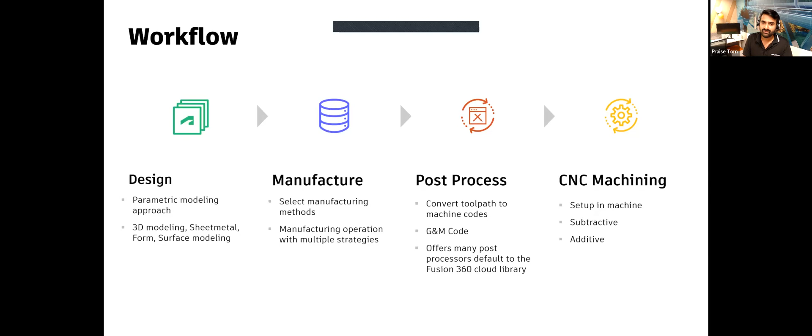So basically, a CNC machine operates based on graphing coordinate pairs, which we all did in our schools. For example, if you say a 2, 3 location in the XY plane, you know how to mark those points on the graph sheet, right? So basically, there are a set of G codes and M codes. Based on that, the machine will operate. And if you give the coordinates, it moves to the respective position.

For example, these are some of the important codes which you should know as a beginner. M06 T1 is the command for the machine to change the tool to 1. M03 S7000 means spindle start in clockwise direction at an RPM of 7000. M04 is for anti-clockwise direction. Next one, G54 is for the work coordinate system, where we set up the work coordinates for the workpiece.

G90 is absolute coordinates. What it means is it takes all the coordinates with respect to the work coordinate system. G17 is the XY plane. G43 H1 is the command which we give the machine for the tool offset value. And M08 is coolant on. Then we give all XY locations. Based on all these codes, the machine will start moving to the respective X and Y coordinates. As you know, Z is perpendicular to this plane, right?

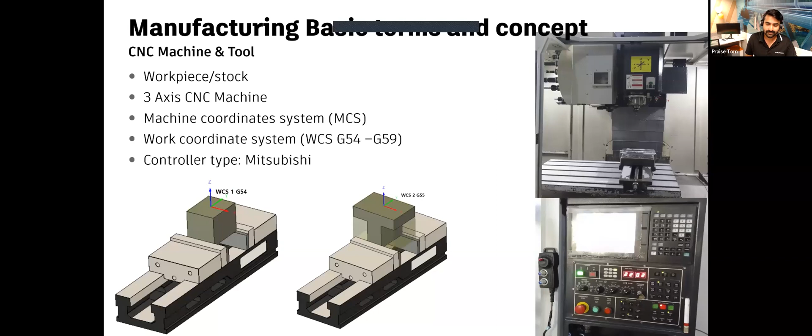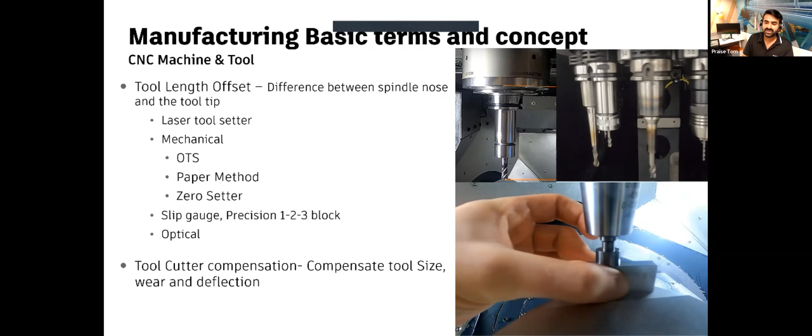There are some methods to get the tool offset value. The first one is the laser method. It has a laser sensor, with a laser beam measuring the length. Next one is the mechanical method, where you use a mechanical device and touch the tool onto this device to determine the length. Next, you can use a slip gauge or a precision 1-2-3 block. It's a predefined size block, and you can jog the machine onto it. The last one is optical sensors, which determine how far the tool tip is from the spindle nose.

Next one is cutter compensation. This is basically for tool diameter, tool length, or tool wear or deflection. If you are undergoing a continuous production process, the tool will wear after 2 or 3 operations, depending upon the tool. So it's our duty to maintain the precision. You always have to measure the tool diameter, and if there are any changes, you have to compensate that in the machine so that you will be able to produce accurate components.

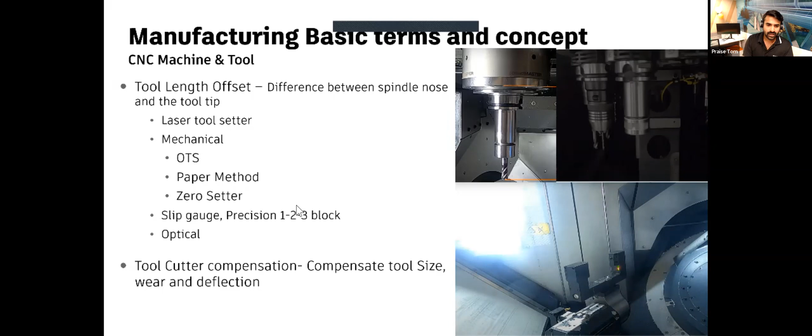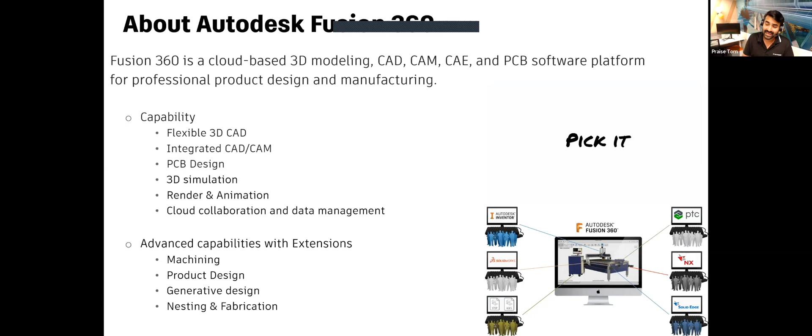As an intro, in Fusion 360, most of you know that it's a cloud-based software. It has integrated CAD, CAM, simulation, generative design, and cloud collaboration. Additional capabilities with the extension allow you to work with product design, nesting, and fabrication for sheet metal parts.

So basically in the Fusion 360 workspace, most of you know, I will quickly go through it. This is called the data panel, and these are the available workspaces. Towards the right, you can see the toolbars. This is known as the browser tab. And on the bottom, you see the design timeline, meaning if you select any component, you will be able to see all the processes which have taken place.

In Fusion 360, all files will be saved in the cloud. You can create a new project like a folder, and also invite people to your project. So these are the components—there are 2 components. I'm going to save this in the correct location, and it's going to save as version number 1.

You can always edit, as all other software do—it's parametric, so it will adjust automatically. You can use the assembly tab to do the connection. Then, finally, if you save the component, you can see that it takes place as version 2. At any point in time, you can go back to version 1 and see all the changes you have made.

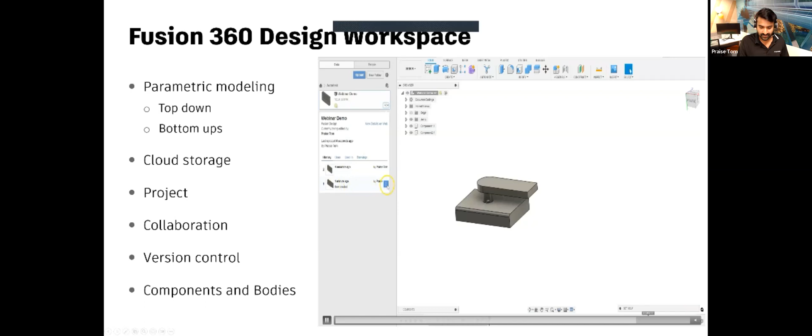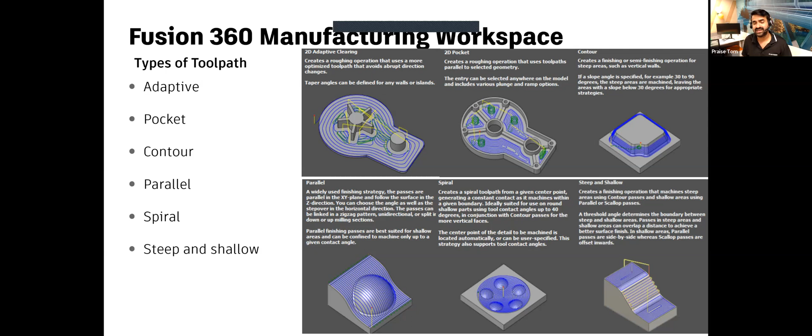Let's explore some of the important points you have to remember while setting up the manufacturing job in Fusion 360. First, you have to decide the work coordinate system. Then you have to decide the stock. Then you create the toolpath. Then you post-process the toolpath, whatever was generated in Fusion 360.

This is the manufacturing workspace of Fusion 360. It has milling, turning, additive, inspection, and fabrication. For this part, we are going to do a milling operation. The first process is to create a setup, then generate the toolpath—you see the toolpath there. So let me create a new toolpath here. The machine is optional; select the operation type first.

You can define the work coordinate system, then decide what model you are going to check. Accessibility analysis checks whether you are able to access all the areas with the tool. The next process is to set up the workpiece—there are different options. You can use fixed or relative, whatever the available standard size of workpiece or stock you have. The next tab is for naming the program and setting up the work coordinate system.

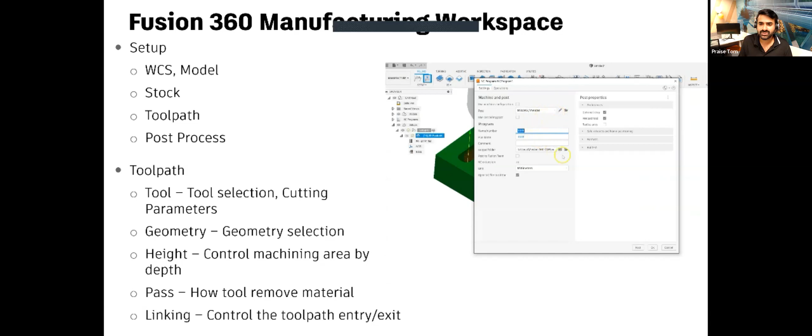So once it's done and you're happy with it, you can post your toolpath into G code and M code. You have to choose a post processor according to your machine. All right, so it's going to create a G code and M code as you see here.

So this one we are going to insert into the machine, so the operation will take place. I repeat, in any manufacture workspace, first thing is you have to decide what is the work coordinate system, so that the machine will understand this is my work coordinate system. Select the model which we created in the 3D design workspace, select the stock available to you, create the toolpath, then post process it.

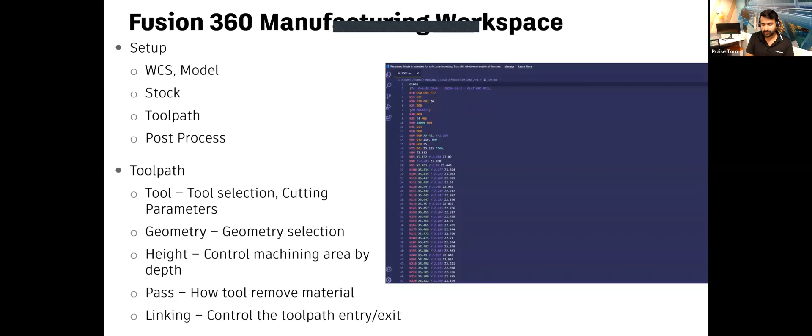All right, so this is the model which we have manufactured. This is an aerospace component which we did for testing purposes before the actual production. It has two holes with a thread and counter bore. There are a set of slant edges and a curved face here.

Generally, to finish this part, you need to have two setups, right? We can use facing, drilling, tapping, 3D, 2D, all the toolpaths to finish this part. So let's see how to set up this first.

So I have the components here, I hope you can see it. Yep, so this we have created in the CNC machine. So the problem here is to decide which face we have to cover first, right?

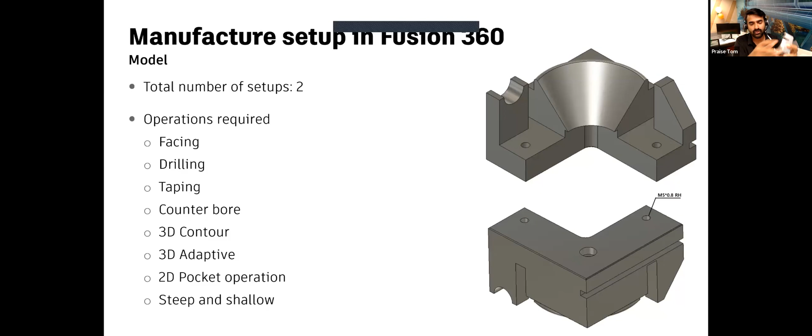So here, if I cover the top face first in my setup one, you have to flip it over. So we might have less space to hold this workpiece on a vise. So what we decided, the best way to go with it, is you have to finish setup number one first, like this.

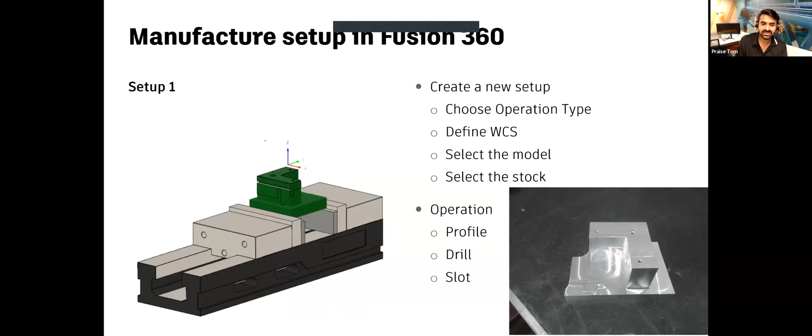So we are going to use a profile operation, drilling, and slot operation, or the undercut you can see there. Once we've done that, we will get an output like this. So now we will take this and finish the workpiece in setup number two and finish the job.

So to create this model, we need to have two setups in a 3-axis machine. Here we have a set of operations which we chose according to our machine and the toolpath. There is no hardcore rule that you have to follow only these kinds of toolpaths to create this model. Of course, it will vary from person to person, and depends upon the machine capabilities as well. The feeds and speeds you always have to refer to the standard manual. You can decide; we are not talking anything about that right now in this session.

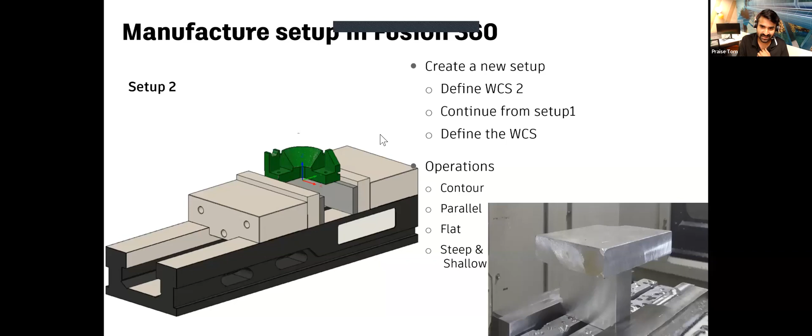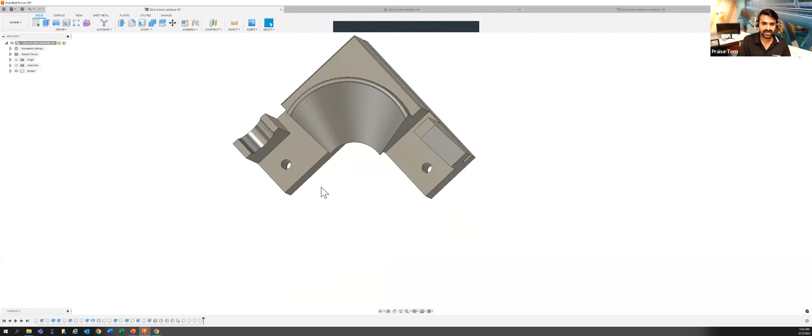All right, so let's get into Fusion and see how to set up the job. So the first process, as I mentioned, this is the model. What you see here, it has a slot undercut, and here we have a threaded hole, and there is a counter bore here. In the manufacture workspace, we have to first create the setup. To create the setup, just click here and the option here.

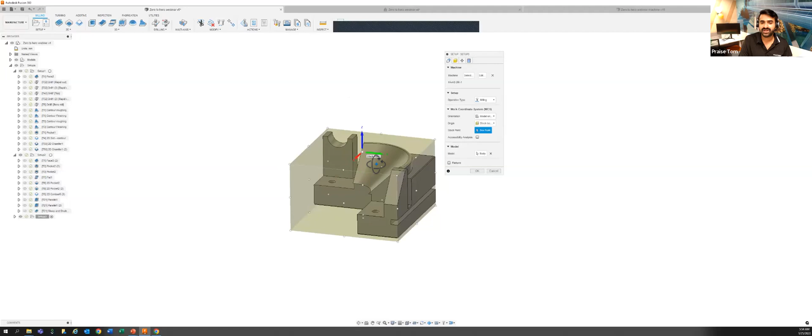If you have any model, first process, what you will do is select a stock. You have to select a stock first by using fixed or relative size. Then you can decide what type of operation you are going to do. Then you can select what is your work coordinate system. The work coordinate system can be defined based on the workpiece or on the model, wherever you can measure it on the CNC machine. Select the model, and here you can type your program number and the work coordinate system here.

So while setting up the workpiece on the CNC machine, the first thing you have to do is set up the vise in such a way that it is aligned properly.

Then you have to load all the tools which are required and add all the tool parameters, diameter, tool offset to the machine. So you will have a set of tool numbers, maybe let's say 10 tools, and you will have to add the corresponding diameter and length. Then the next process is you have to set up the work coordinate system.

As I mentioned, the machine has its own default coordinates. So by defining the work coordinate system, we are telling the machine where my job, the workpiece, is located. You have to create the toolpath around that.

For that, you have to load the stock, then use the edge finder to find the edges, and use the zero setter to find the height or length of the tool.

Basically, the edge finder is a tool where, when it runs at a certain speed, the bottom portion is coaxially placed. Once it touches any surface, it will move out so that you can take that coordinate and add it to the machine.

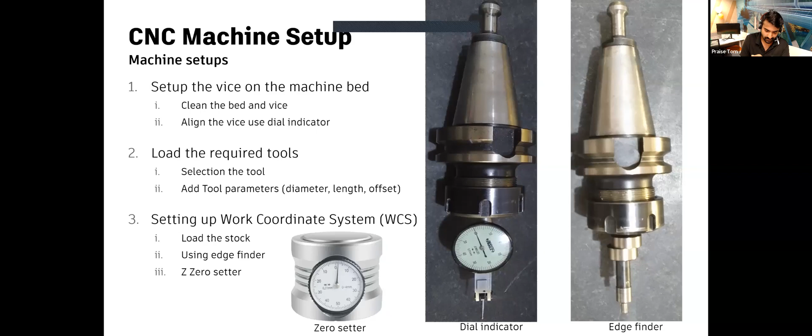So let's see the process in detail. The first one is setting up the vise. You have to take the dial, fix the vise on the bed, and try to align it, making sure the dial reading is not changing, meaning it is horizontal to the machine.

Next is the zero setter. To find the tool length offset, you take the tool and touch it on this zero setter. This zero setter has a 50 mm height, and the machine knows where its bed is, so it will take the reference from the nose to the tool tip. Similarly, you will have to do this for all the tools and add them to the CNC machine.

So the next step is setting up the work coordinate system. For that, we use the edge finder, which is rotating at 7,500 RPM. Once it is touched to the surface, you can see a small oscillation here, it's offset from its axis. Take that coordinate, and the important point here is you have to find the center point.

So it has a diameter, and you have to subtract the radius to get exactly the center point. You subtract the radius, and then only will you get the edge of the workpiece.

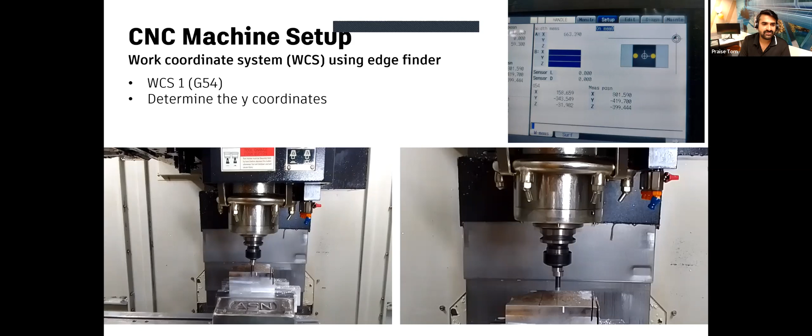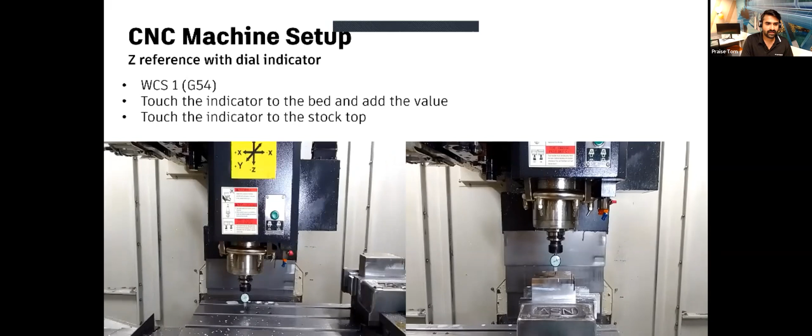Moving on, once you set up the job and the workpiece, the next part is to generate the toolpath. So let's see how to generate the toolpath for setup one in Fusion 360. I'm saying it again, this is not the only way to create the toolpath. You can use any type of toolpath to finish this model according to your machine capabilities and tool properties. So this is my work.

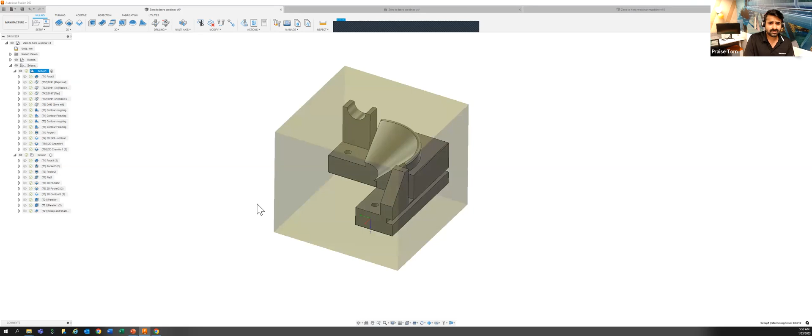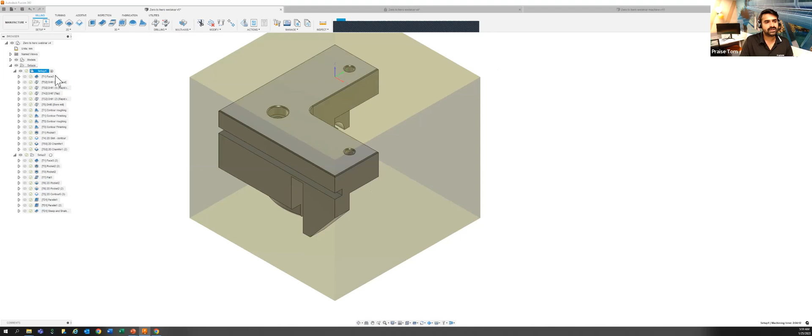This is my model and this is my stock. The first process is you're going to finish this. Let me just align it. Yeah, we are going to finish this setup first. That means our work coordinate system is here. The first process is a facing operation. So all these tool movements are taken with respect to the work coordinate system because we are using G90 absolute coordinates.

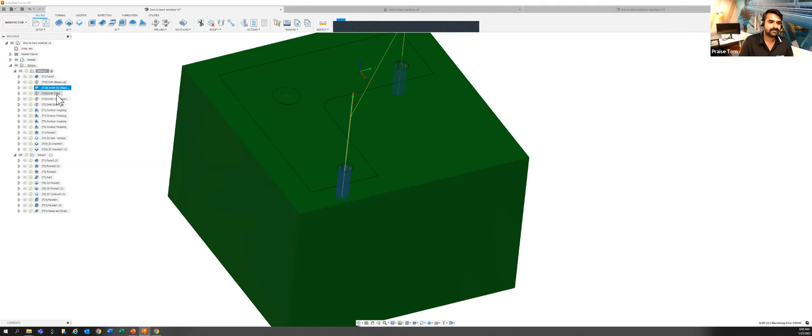So the next process is the drilling process. Before you do any drilling process, you have to do a spot drill so that the drilling can happen properly. Then the drilling, then the tapping. Tapping is for the threading operation. And then you have a contour roughing, then contour finishing, again the contour roughing inside pockets, contour finishing here, then the pocket, and there is an undercut here. So we use a contour operation, then finally the chamfer.

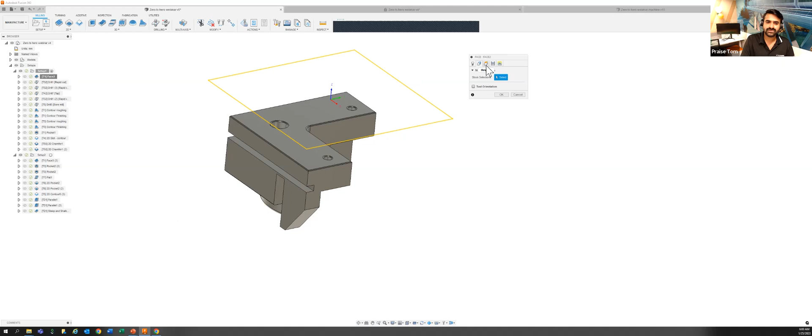So in a facing toolpath, you don't have many things to select or worry about, because since your model is already selected, you just have to set the bottom reference. Bottom reference is nothing but the point till which you want to cut the material. You can select from different types. So I chose my model top as the bottom reference. That means it's going to cut till the model top.

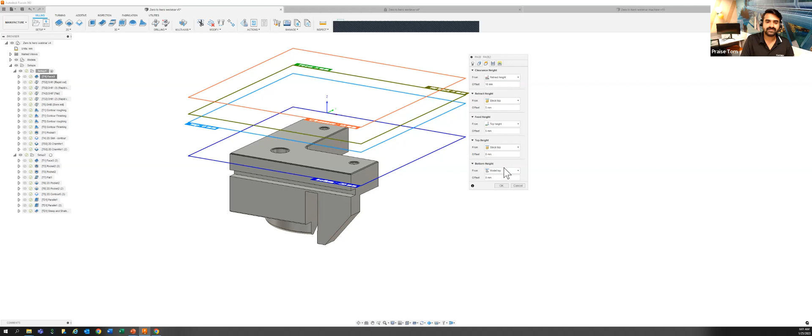And in the passes tab, you can choose the operation which you want. Here, since my tool is not carbide, I have to make sure that the depth of cut, the step down, is less. So I just use the minimum multiple depths here. And in the linking tab, how the tool should approach. Then the next operation is drilling. It's a spot drilling here.

So in the spot drilling, what I selected here is the hole face, right? And then the bottom reference I chose as the chamfer diameter. What is the chamfer diameter? Yeah, pretty much that we have to give as input to create a spot drill. If you are new to Fusion and new to the workspace, the first thing you have to do is just select the face, click OK and see how the toolpath is generated. If it is not according to your need, then come back and see what else you can adjust.

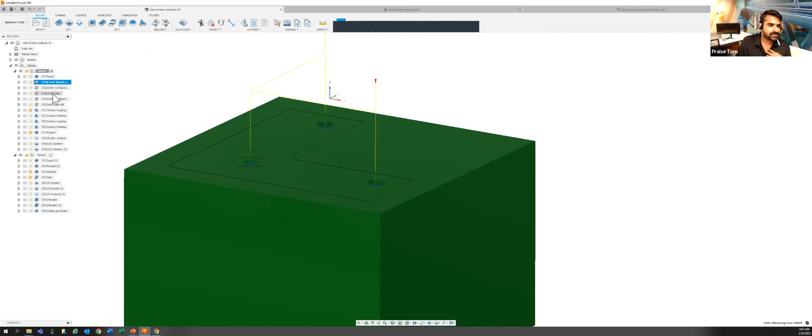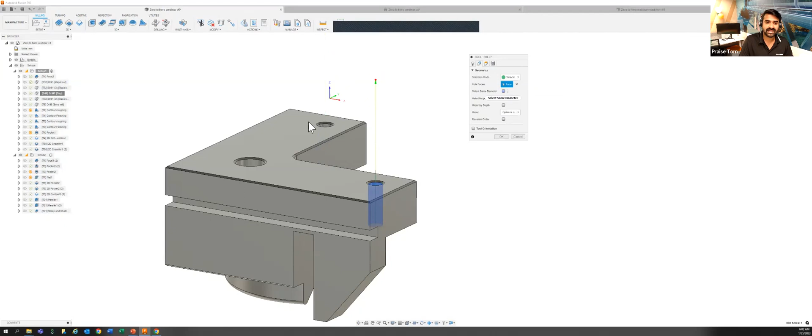Right, so then the next process is drilling. Here you have a geometry. You have to select the face. In the geometry tab, of course, the tool is default. And select the diameter. If you have multiple holes, you can use the same diameter option so that it selects the multiple same diameters at once. You don't need to select one by one. And again here, this is the height tab. That means till what depth the drill bit has to go. Then the cycle operation, whether it is tapping or drilling.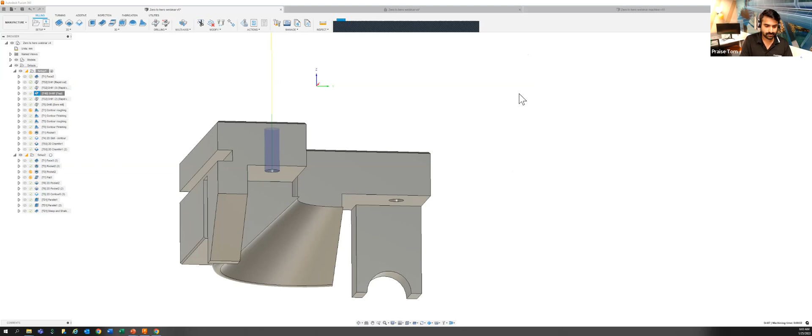So basically in the drilling workspace, all the methods look the same. The only thing is the operation, whether it is drilling, rapid out or tapping, has to change in the cycle type. So let's get into the PowerPoint and see how the toolpath is generated. As I mentioned, there are a set of operations you can use to finish setup number one. This is the spot drill, which we use initially to make sure the drill bit passes through the material properly. We do it on the center point of each hole before the actual drill. The next one is the tapping operation. We use a tap tool, select the hole and use the tapping operations here.

All right. And the next one is contour operations. As you know, they're used to finish the wall. You see the contour operations of internal finish, right? And this is the profile outside. As I mentioned, there is no right or wrong way, no hardcore rule. For example, here I use a face mill to finish the contour operation. It's not necessary to use an end mill to create the contour operations, right? So it's up to you. So let's see in Fusion 360 what the contour operation does.

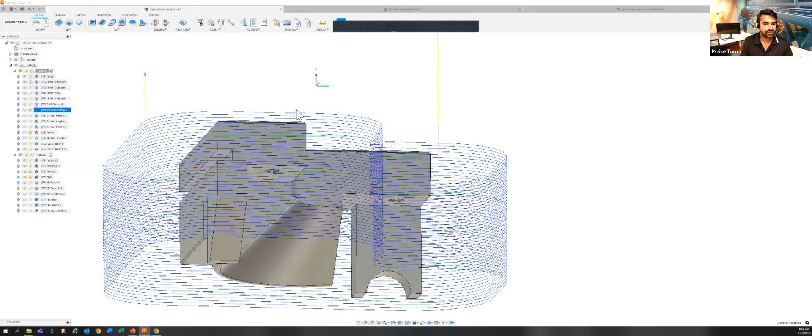In contour operations, what you have to do is select the tool which you want and decide whether the tool has to stay within the boundary or outside the boundary. You have different options, bounding box or a selection. You can choose according to the model. And the important step here is rest machining. Once you enable this, it will continue from whatever operation we have finished. All right. And the next one is to decide the height, how much depth your tool has to go.

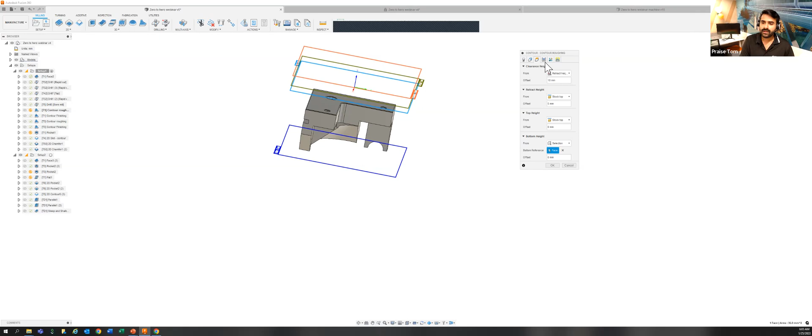Then in the passes tab, you decide how much should be the tolerance. That depends upon the machine and its accuracy, and the direction type, whether it is both ways or one side. Then how much stock you have to leave in the workpiece. Then this option is for a multi-axis machine. Anyway, it's a 3-axis, so we are not going for it.

In the linking tab, what is the type of retraction policy? Once it's done an operation, should it come back? How frequently it should come back, so that it will allow some time for the chip and the tool to cool. And lead in and lead out is how the tool should approach the workpiece. Okay, and that is the roughing operation.

Then I use a finishing operation around this model. So what I have done here is I selected an option to avoid touch surface. You have multiple ways to do it; I'm just showing you the different ways you can select this, so that it avoids touching all those surfaces. It just goes only around that. Or you can even create a sketch and select the geometry.

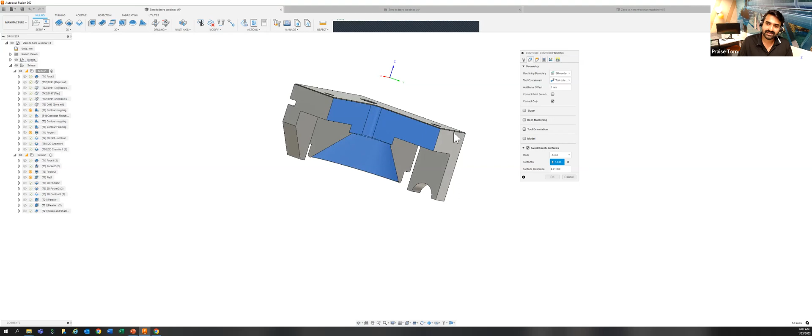Again, the height tab is the same. You can decide how much depth you want to remove the material. Then in the passes tab, again, it's all a repetitive process. You have to click on it and see how the toolpath is generating. If you're happy with it, you can go ahead with that and control the speed. If not, you can go back and edit it here.

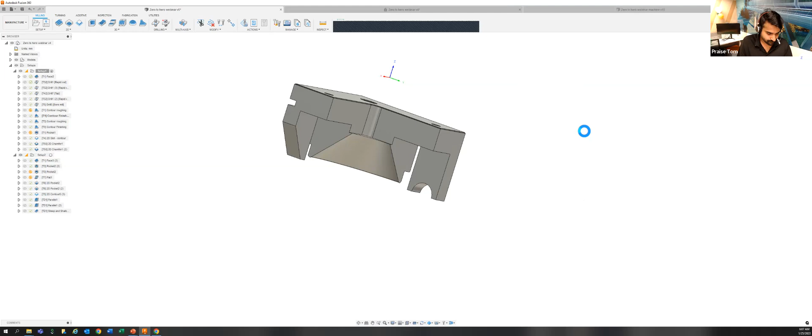All right. So let's see in machining, CNC machining. Yeah, so I didn't cover this. In the slot operation, there is an undercut here. So we have actually a 2D slot, but the problem with that is the slot should be perpendicular to the tool. So we can't really use this slot over here. So what we use is a contour operation with a T-slot cutter. So this is the tool.

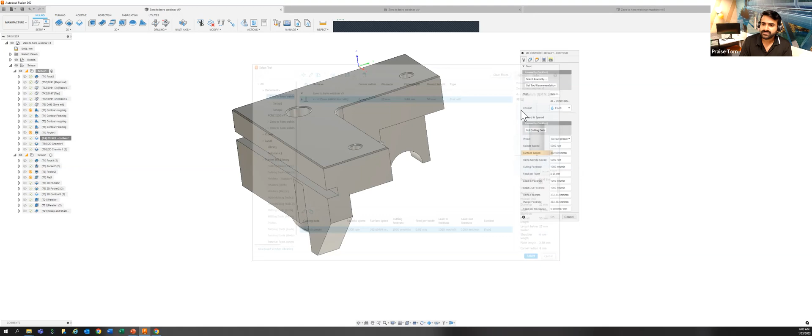If you don't have the tool in the library, you can go back here, select the tool, and you have an option to edit the tool and create a new tool; you can change the diameter and add feed and speed data here. So I use a T-slot cutter here, and the contour selection is here, one edge.

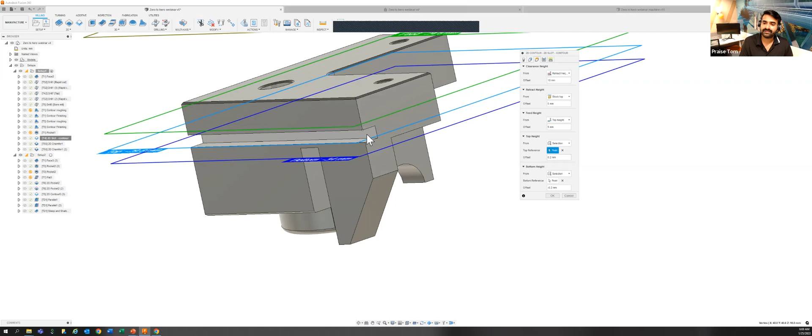And in the heights tab, I took this as a selection point. So here you have an option. You can choose select and select the point or edge or face. And accordingly, you can give the offset value with respect to that. All right, so let's see in simulation how it works. So this is a T-slot cutter, which cuts the material. Yep. So basically, this is the operation. We use a contour toolpath here, not the slot.

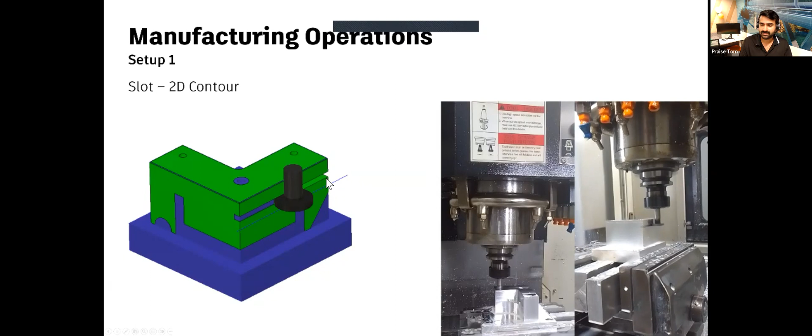Yep. So the final part of setup one is to chamfer all the edges. So we can use the chamfer toolpath, sorry, the chamfer tool to finish the workpiece. For that, you have to define the chamfer width in Fusion 360. So in the Fusion screen, you select the geometry first, right? Then decide how much should be your chamfer width.

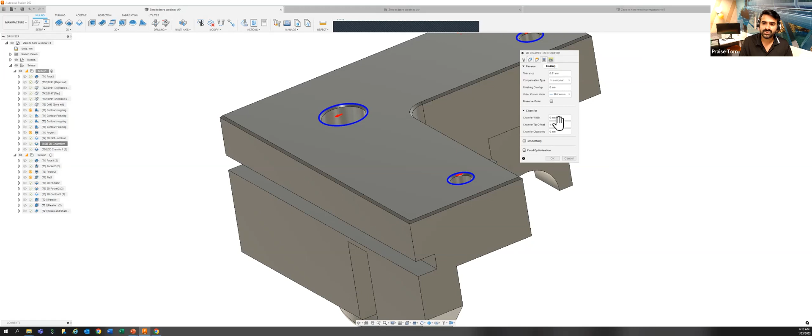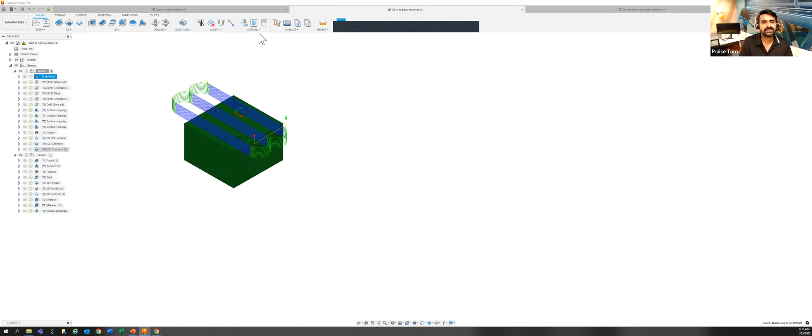So this is my chamfer offset. So I choose 1 mm because my chamfer is 1 mm. Choose that. It's going to finish the toolpath here. Similarly for the edges. So choose the edges of the model, give the chamfer offset, and it's going to create the toolpath, right? So finally, if you want to see the toolpath in Fusion 360, you have an option to simulate to see how the toolpath looks, right?

This is pre-drill, drill, then contour operations. Yeah, roughing, finishing. This is the finishing of the internal with the end mill, then the contour finish. So to remove this extra material, I just use the chamfer finally. All right, so that's how we finish the first setup for the workpiece. So as an output, you will get a workpiece, the model like this.

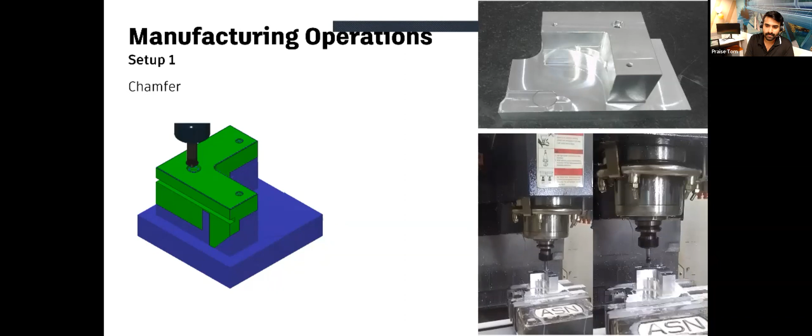Now what we are going to do is flip the workpiece and set up the job. Before doing that, you have to define the work coordinate system. So for that, take the dial indicator, touch on the reference, go to the workpiece, touch on the bottom surface of the workpiece, or if that's not possible, you can touch it on the soft jaw here.

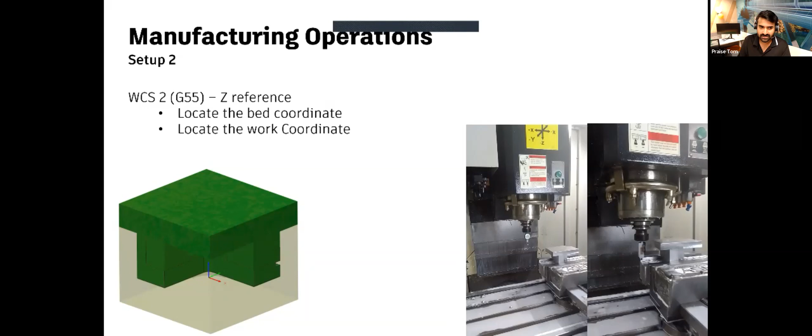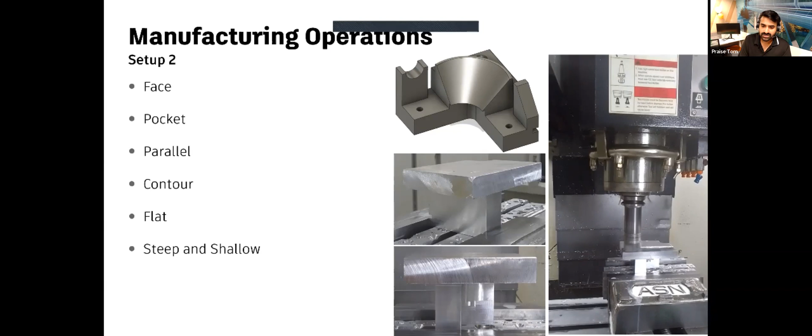Why we are going with the finished bottom surface is because it's already finished. So with respect to that, we are setting the reference. So we fix the Z reference first, and let's do a facing operation here in setup two. I'm doing the facing operation so that the additional stock will get removed. So finally, you will get a workpiece something like this.

Okay. So on a finished component, we are setting up the work coordinate system again, because it will give you the more accurate result and you will be able to generate the part from here. So here, the first process, as you know already, is X and Y coordinates. Take the edge finder, touch on the Y side of the workpiece where it is offset from the axis, plot that point minus the radius of the edge finder.

Similarly, for the x-axis, you can repeat the same process, which will add all X, Y, and Z values for WCS2. If you call G55 in the program, it's going to choose WCS2, right? This is setup 2. We are going to hold the part on the finished surface, because you have to go for the other setup now, right?

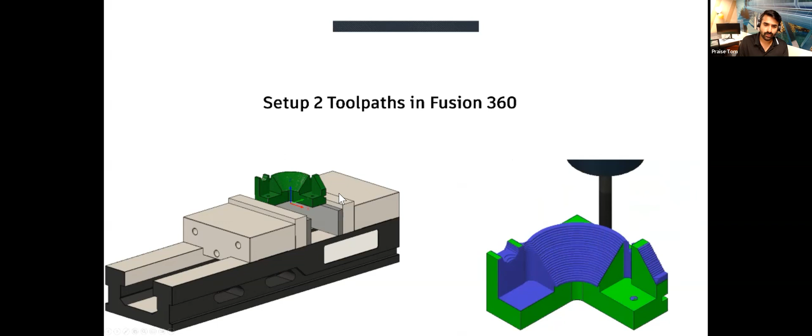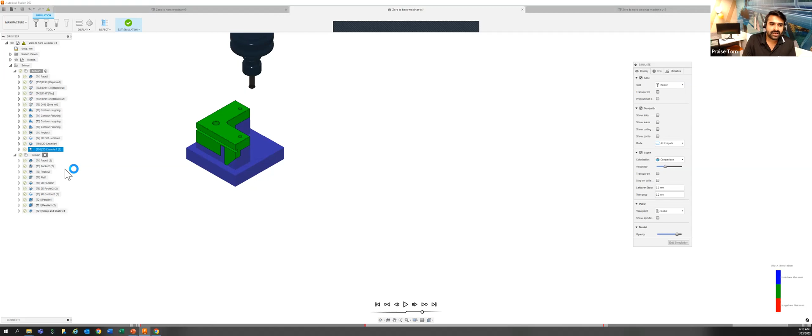So let's see in Fusion 360 how we set this up. The process is the same. My aim here is for you to understand the basic setup you can do in setting up the workpiece. For sure you are not going to use the same model, so there is not much point explaining each and every point in the tool paths in each setup, because you have to practice and get it. So what I'm showing here is what I have done for this tool path.

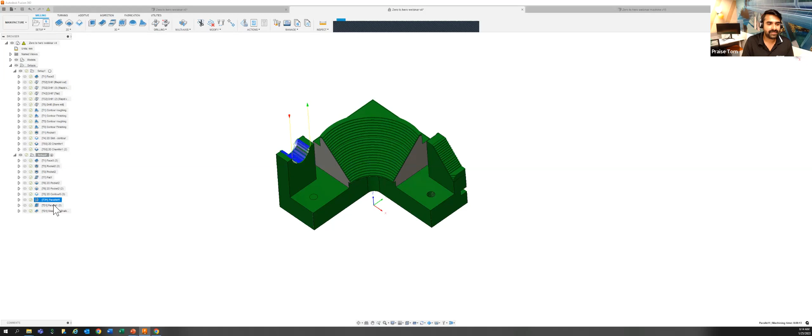So let's take the face, take out this, then use the pocket, then a finishing operation here. So it's going to finish the part like this. Then the flat toolpath is to finish the flat surface, then the pocket operation to finish this area, and the contour operation to finish the wall. And finally, the parallel toolpath for these surfaces, and steep and shallow for this curved surface, right?

So importantly, what changes here is in the setup: the stock you have to choose from the preceding setup. If you choose this option, whatever stock remains after setup number 1 will be taken forward. Okay. And you have to enable continuous machining to continue from that part. That is the only difference here, which I set in setup number 2.

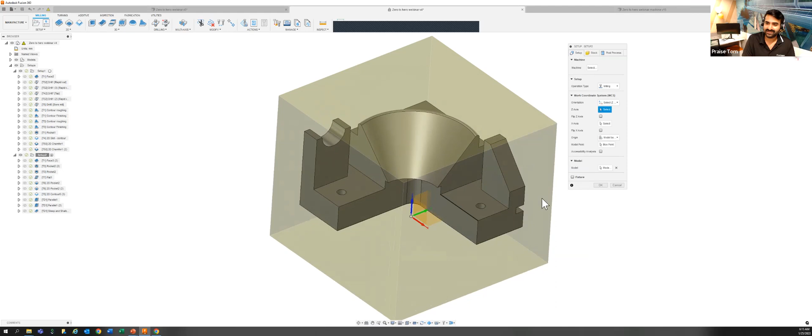And the next one is the work coordinate system. As I mentioned, we are taking the work coordinate system to the finished area of the workpiece, so that you will be able to get the model properly rather than just going with any other workspace. So for the facing operation, select the tool. You don't need to select the geometry because by default the model is selected. Go to the passes, go to the height tab and decide how much material you want to clear.

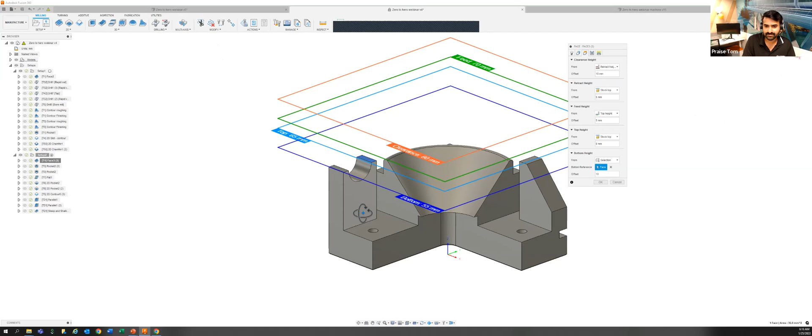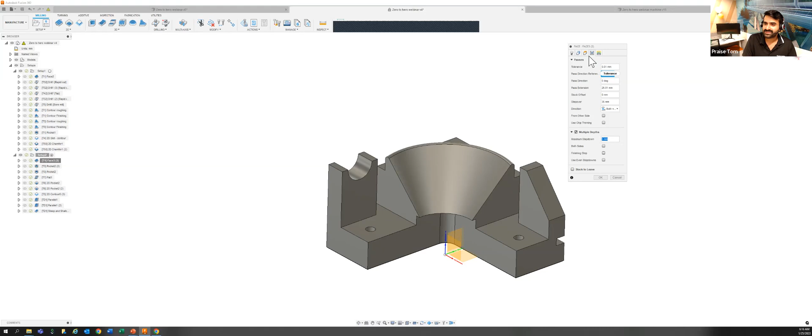So over here in the selection process, as I mentioned, you can use the selection, and I chose this as a selection point. It's a plane. So it selects the bottom as that. And if you want to adjust the bottom height, let's say I want 10 mm from that selected plane, it's going to adjust it, right? If you need multiple depths, or if you are using carbide tools, maybe you can do it in 1 or 2 goes. Here it depends on my tool. I chose 5 as a step down, then the linking tab here is the same.

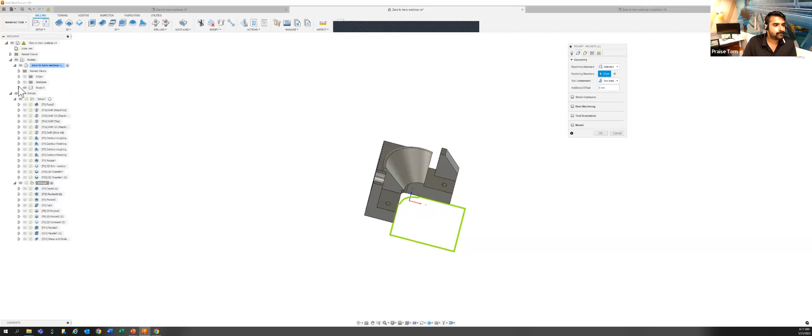Then the pocket operation. Again, here you can select this chain. As I mentioned, you can create a sketch and select the chain in the model. If you see the model here, you can see a set of sketches which you can select. This is for the pocket operation. You can select this as your machining boundary, so that the tool path will be created there.

And this option will keep the tool inside the boundary, and center on the boundary means the axis of the tool will be along this boundary. Outside means the tool is going to cut outside the part. Okay, right. Then again, the 3D pocket operation to finish the components here. You can go with adaptive clearing, or you can go with pocket clearing. It's up to you. You can even go with 2D adaptive clearing.

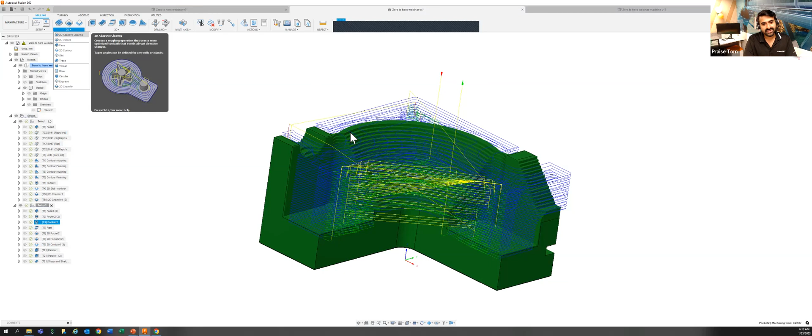But in 2D adaptive clearing, you won't be able to finish this slant face. So that time again, it takes more time. So it all depends upon you. You can choose any toolpath as a beginner. You can choose any toolpath and see how it behaves and how it generates the toolpath. Then you try to modify, simulate and see whether it's cutting all the areas.

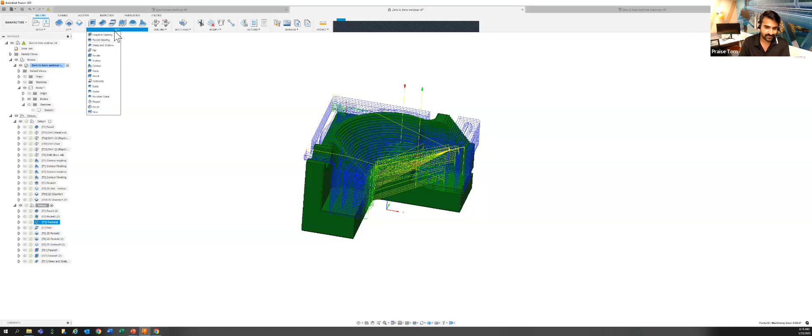Keep modifying the geometries. All right, so let's see some of the operations which we have done in the machine. So this is the part which we get after the facing operation. Then we have to do the pocket operation to finish the part. This is the flat toolpath here. And this is the pocket operation.

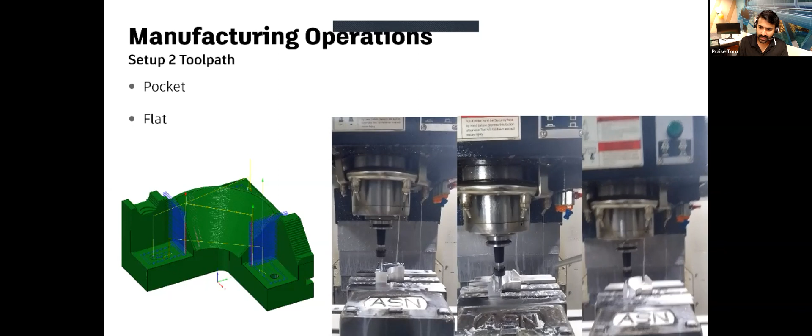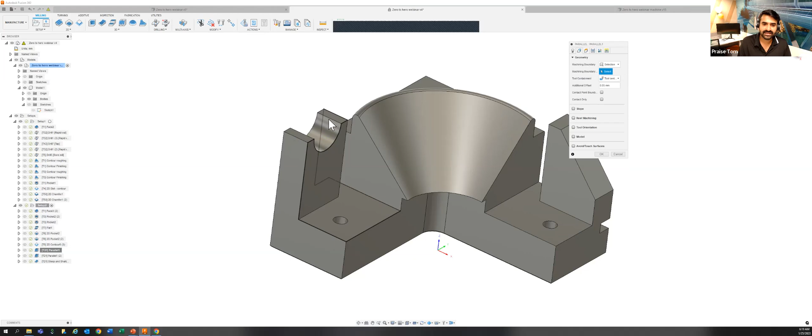And finally, to finish with, we have to use a parallel toolpath, which we haven't covered yet. So in parallel toolpath, as I mentioned, it will create the toolpath parallel to any plane. So select this plane. Let's say you can select this geometry. It's going to create the toolpath around here and decide what height you want to cut the model.

Then decide whether you have to leave the stock. This is a finishing operation which I'm doing, so I don't want any stock left there. Similarly, for the other side, again, you go to the chain, select the model, select the tool. Yep. So for finishing operation, you have to make sure you choose the ball end mill. Only then you will get the proper finish.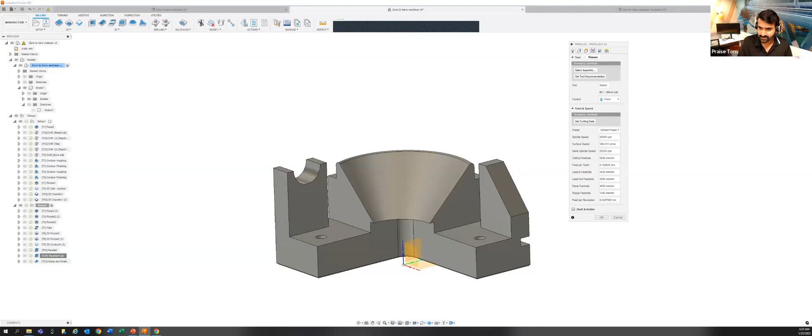So for roughing operation, you can use flat end mill. And if you have any fillet in the model, you can use bull nose end mill. All right. So, oh yeah. So here in the passes tab, let's say I want my parallel toolpath to be generated along this edge. So you have an option to select the toolpath and click OK. You will get the toolpath generated along that side.

And finally, the steep and shallow. So in steep and shallow, in the steep area it follows the contour operation, and in the shallow area it follows the parallel toolpath. So here you have to select the chain. For example, if you select this, you get only this surface. If you want to add this, just click and hold here, and you will get an option to add here. So this is for closed one. This is for the open loop. So it's a closed one.

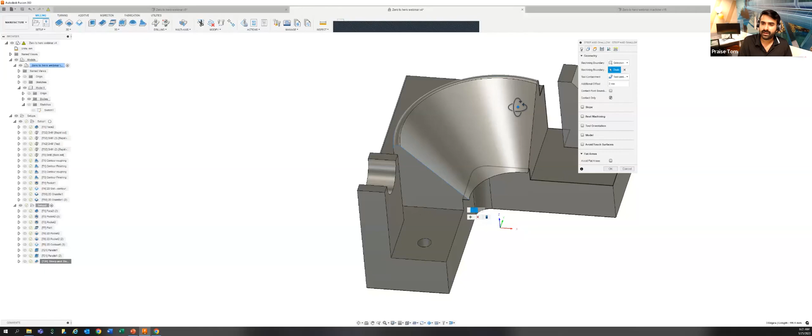So what I'm going to do, I'm selecting this area, right? You can alternatively use the Alt key and add the geometry, right? And define the height, how much height you want to cut. In the passes tab, use the operation type, whether it is parallel or whether it is scallop.

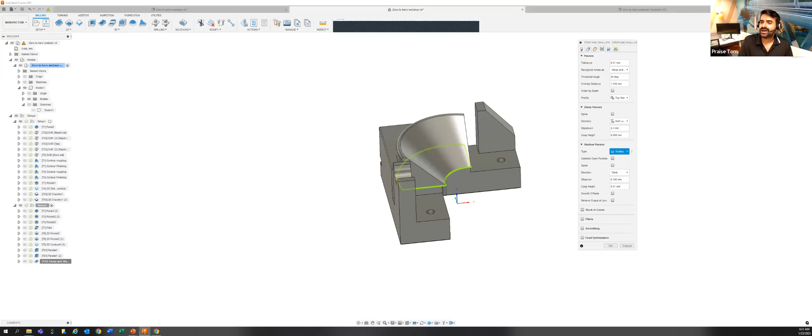Again, so finally, you can just see the operations here in the machine. This is the parallel pass. We are using the ball end mill to finish this edge. And finally, we are using the steep and shallow toolpath for these curved edges.

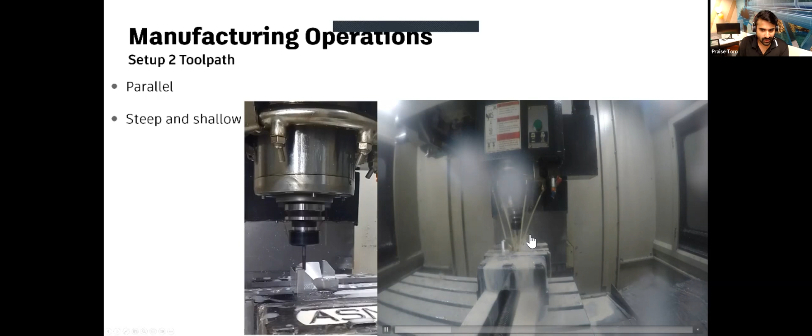So we can also use machine simulation in Fusion 360 for generating the toolpath. So whatever toolpath we have generated in Fusion 360, you can choose the machine for that and see whether there is any clash, whether the tool or tool holder collides with any part of the machine. So basically, this is intended for a 5-axis machine. We can use the stock avoidance setups in the 5-axis machine. So that time it will be very useful.

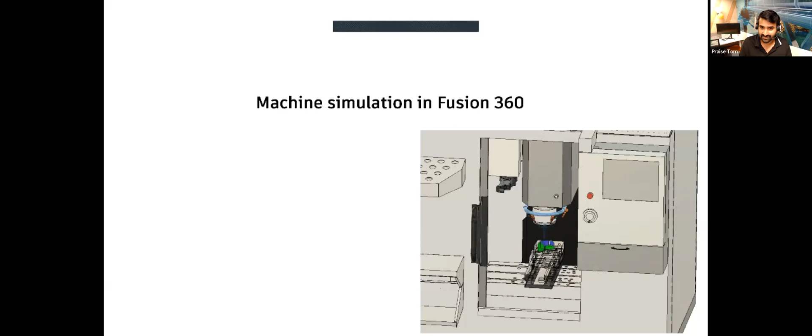So let's see how we select the machine simulation in Fusion 360. I'll give you a brief overview about it, and with that, we will end today's session. So as you see my screen, do you remember when we created the setup, we had an option to select the machine. We haven't selected that. So once you click on this option to select the machine, yep, sorry, select the machine.

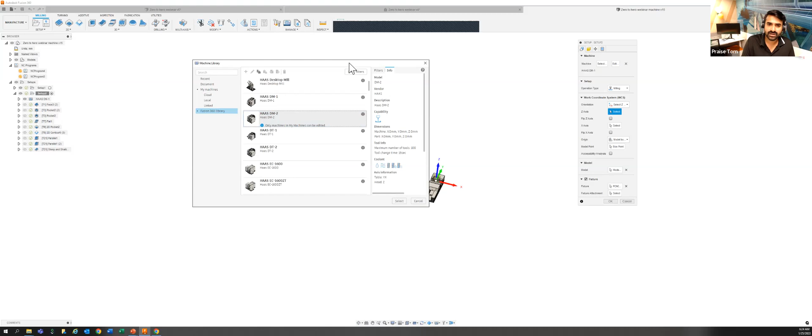There are default simulation-ready machines available in the Fusion 360 machine library. So once you click on simulation ready, the machines which are available for simulation will be listed. You can choose according to your manufacturer, or if you are not able to find the manufacturer, see whether the configuration of the machine matches the machine we are working with. And also, if you have the machine models, you can configure the machine kinematics. That means you can change X, Y values and define what the limit is.

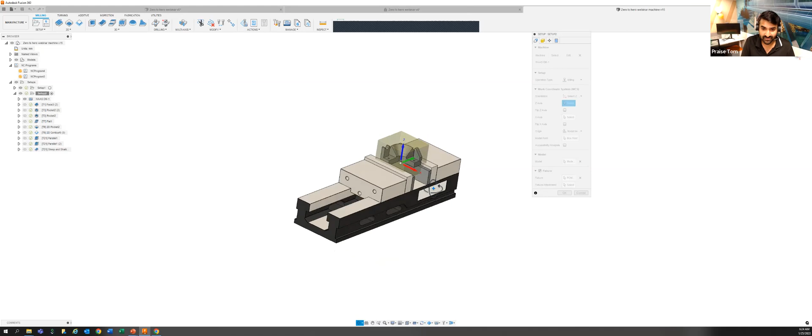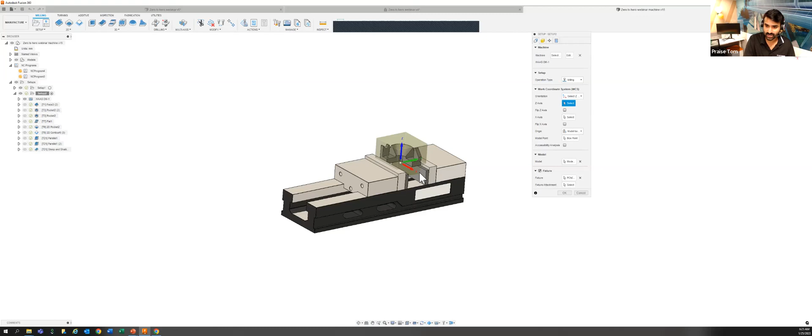You can create your own machine in machine simulation. So another option we haven't discussed in the setup tab is, you see, there is a fixture. So if you would like to add the fixture and see how the model is going to be manufactured, actually, to create the toolpath the fixture or machine is not required. You just have to have a model, select the stock and create. But if you want an overview, a visual representation of how it is going to simulate in the machine, or how the workpiece is going to sit in the machine, you can enable this fixture option here.

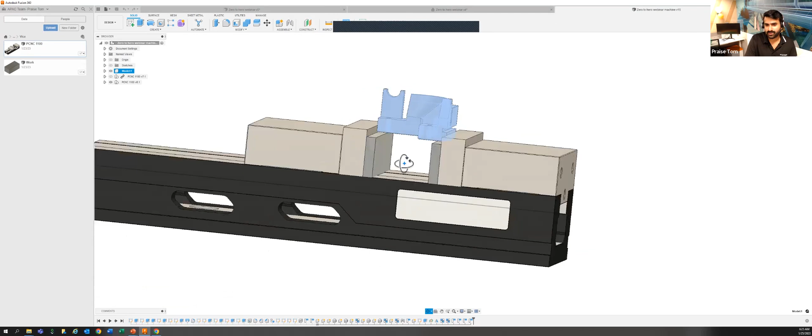Okay, so I just downloaded a vise from our manager Lars. That vise I have uploaded in the design workspace. Okay, this is the vise and this is my model. So I used the move or align option to make sure that the workpiece is fitted properly here. Okay, then I'm going to the manufacture workspace. I have created all the toolpaths.

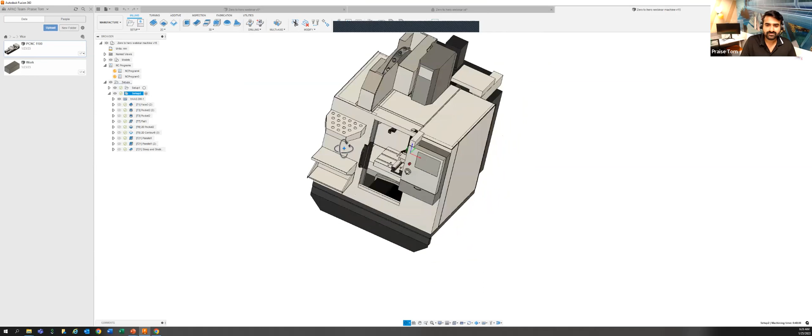At the end, I edited the setup, went to the machine, selected the machine, which will import the machine here. All right. So there is not much to worry about when you import the machine. If it is a simulation-ready file, you just have to select the machine and select the fixture. You will be able to simulate the workpiece. So over here, you have an option, simulate with machine. Okay.

Yeah, it's taking some time. Yeah. Yeah.

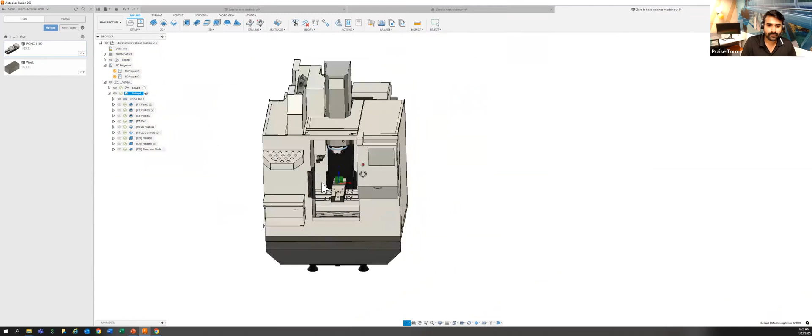You can use simulate with machine and you can see the toolpath. This is the toolpath we have created with the model. The only thing is we just added a machine to the simulation for a better view.

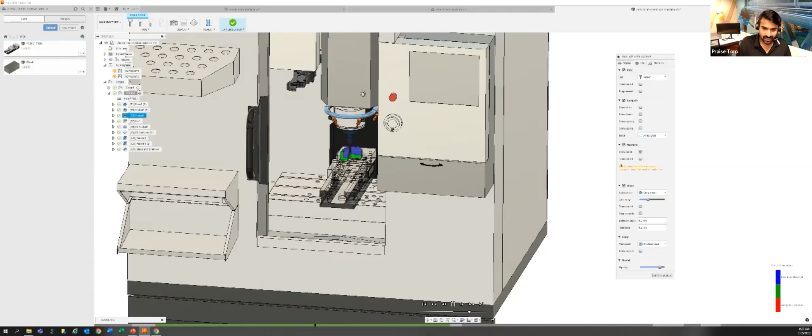All right, so that's all from my end. I hope as a beginner you were able to understand some of the basic concepts. And if you have any questions, I believe Shan is answering all the questions in the chat box. And if you have any, please feel free to ask.